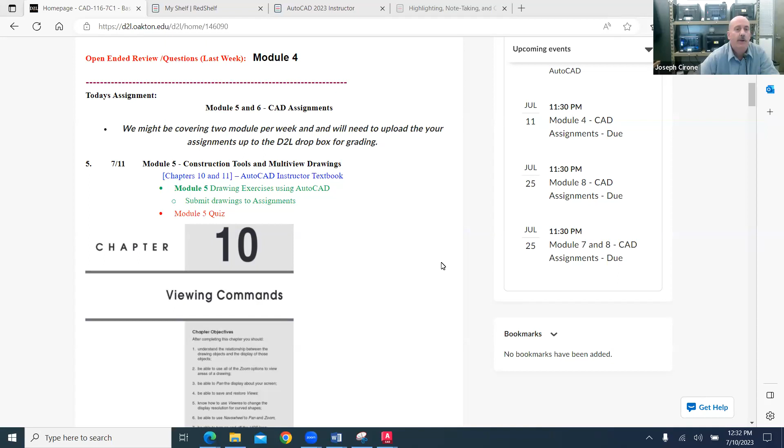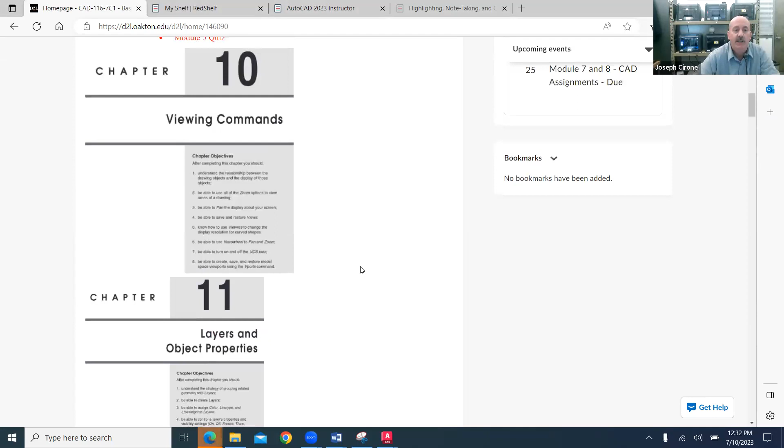Today we're going to look at Module 5, which covers Chapter 10 and Chapter 11 from our textbook. So we're going to take a look at those textbook chapters. And I've also included in the main splash page the drawing assignment. You're to choose one drawing assignment, either one of these two mechanical drawings or this civil drawing.

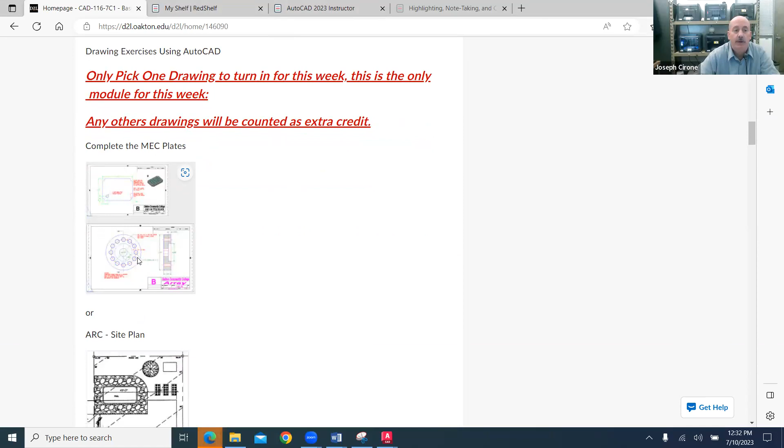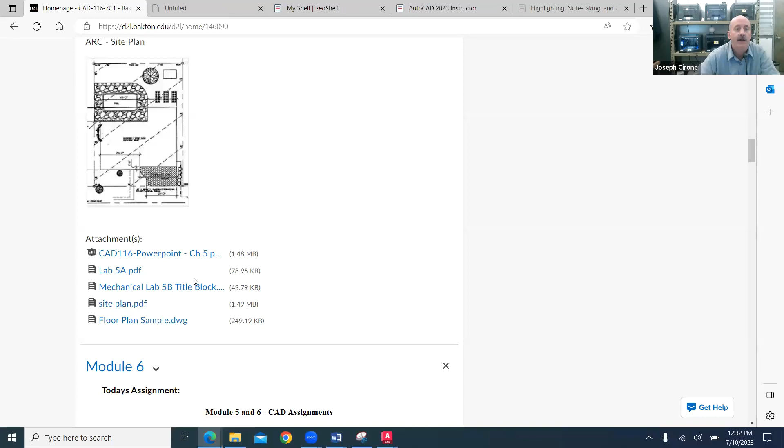And then we have some attachments here for downloads. I've set this attachment here that'll allow us to take a look at an example that we can use for the chapter. So I'm going to download this file right here and open it. And we have this floor plan sample that toggles with the textbook chapter.

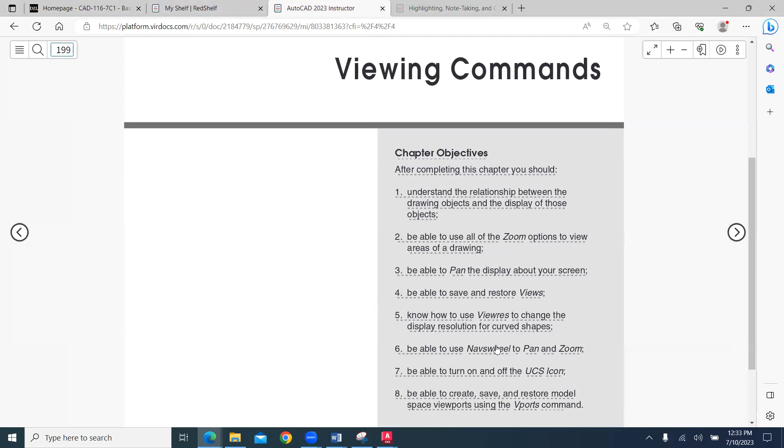And so as we open that in AutoCAD, we can see that, and we can start to set up and take a look at our tabs. We look at the chapter. We're looking at understanding the relationship between drawing objects in the display using zoom commands, pan commands, view resolution, navigation wheels. There's a lot of different ways to do things.

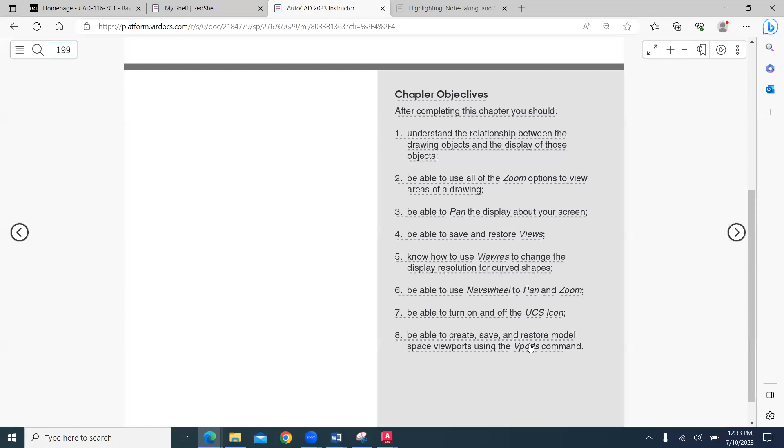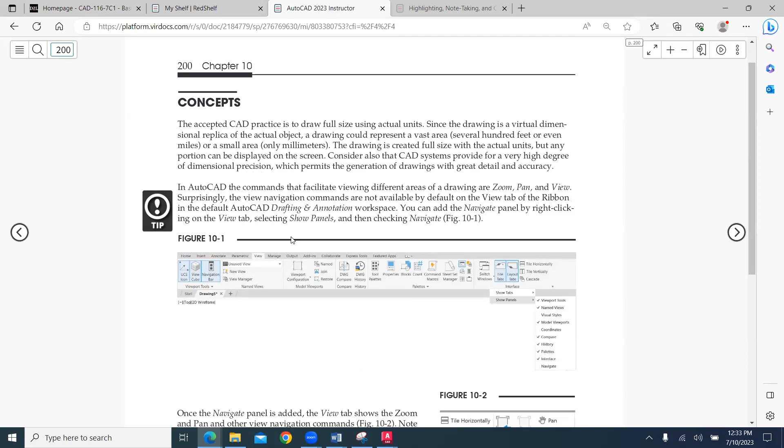User coordinate systems, and then being able to save and restore viewports. The basic concept is that we create these full-size drawings that are scaled to actual units, and then we're able to see them on the CAD system. And so when we look at these different drawings and we open them up, we can use the navigate panel to go through these different display commands.

So we can go to the main splash page and open this floor plan sample drawing, just as an example. And so here's our floor plan sample drawing. And then as we look at that, let's see if we can get this to fit on the screen.

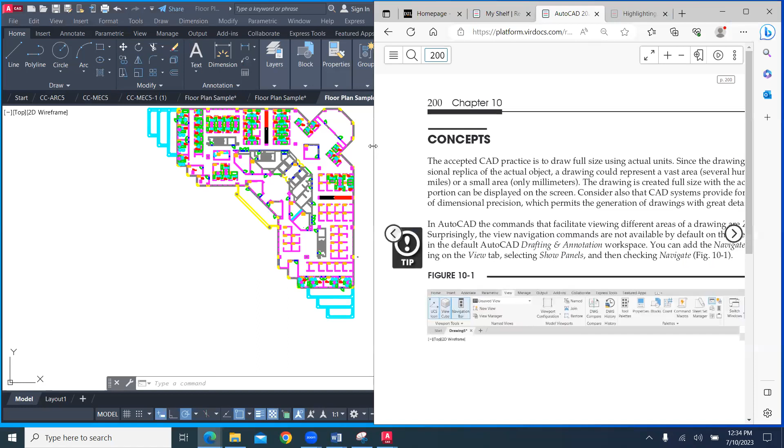So as we look at our sample drawing, the concept is that we would create the drawing full size. And if we were to go back to our CAD system, we can then check our units.

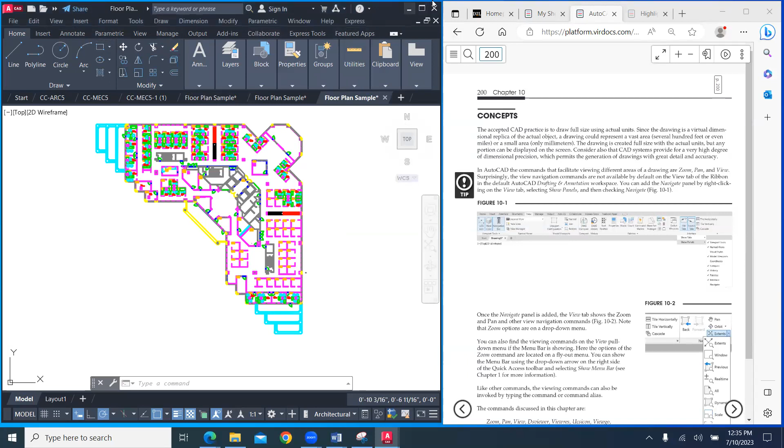And so we can enable our toolbar. And so here's the menu bar. So if I turn off the menu bar, show the menu bar, we'll have this menu bar here across the top. And then, for example, if we wanted to check the format of this and we wanted to look at the drawing units, we could see that this is an architectural drawing, and the units would then be set up in feet and inches.

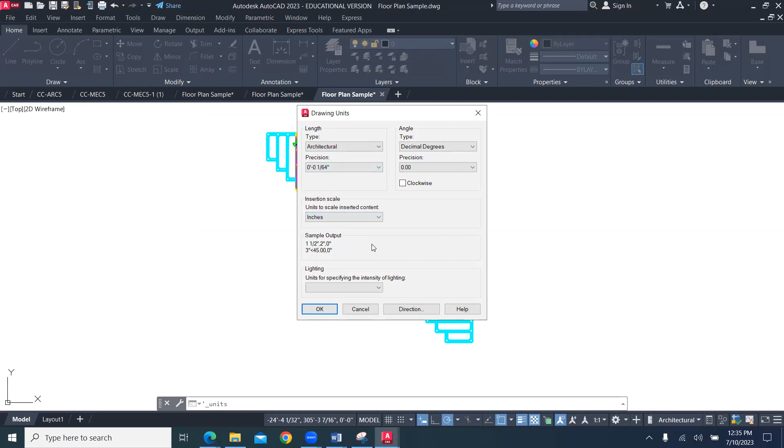We can check the navigation panel and then make sure that we have these different commands active. And that's part of getting to use AutoCAD. And so when we look at the tabs,

we have a home tab, an insert tab, an annotate tab, and a view tab. And if you don't have one of those tabs on, what you do is you right click in an area and then you check to see that you have those tabs enabled. So we have our home tab, our insert tab, our annotate tab, home, insert, annotate.

And then when we're on the view tab, what we want to do is we want to make sure that we have the same tabs that are active. And so what they're showing here is on the tab that they have the navigate panel enabled.

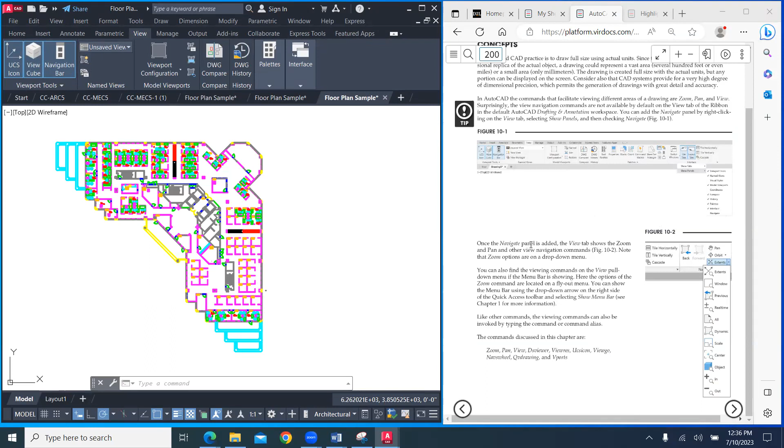And so to enable the navigate tab, what you do is you right mouse click and then you say show tabs, and then make sure, show panels, and make sure that navigate is checked off. So now that navigate is checked off, you can then see these different commands like extents, window.

And so zoom extents will zoom everything that's within the drawing. Zoom window, we could use to create a little box and then zoom in on that window.

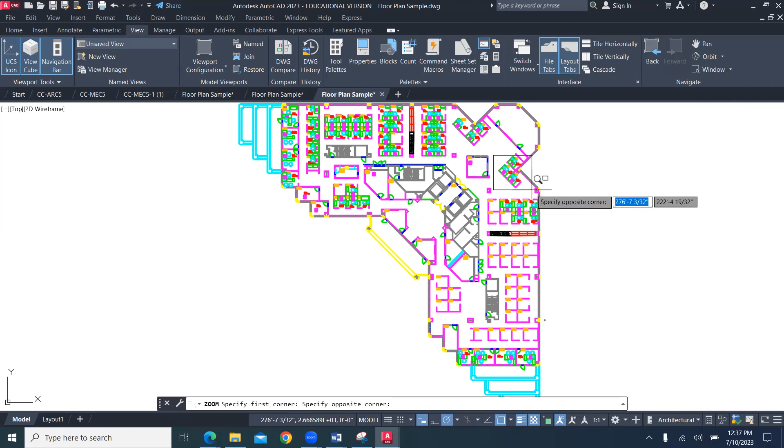The best way to zoom and pan is with the mouse. And so what you really want to do is to get a mouse with a scroll wheel. And so that'll allow you to change the zooming for the mouse by just turning the wheel on the mouse.

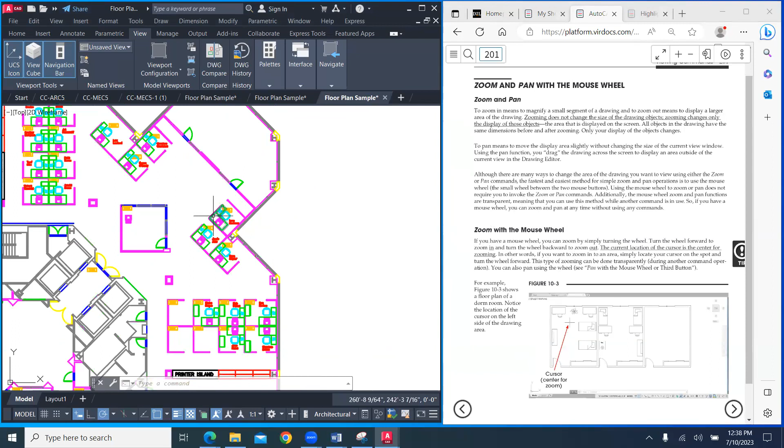And so what they do is they give you an example of how to zoom into a different area. And so if you were looking at the floor plan, if I turn the wheel on the mouse, it'll zoom it out. If I push the wheel on the mouse, it will zoom it in. And it's extremely efficient to be able to go and look at the different areas of the drawing.

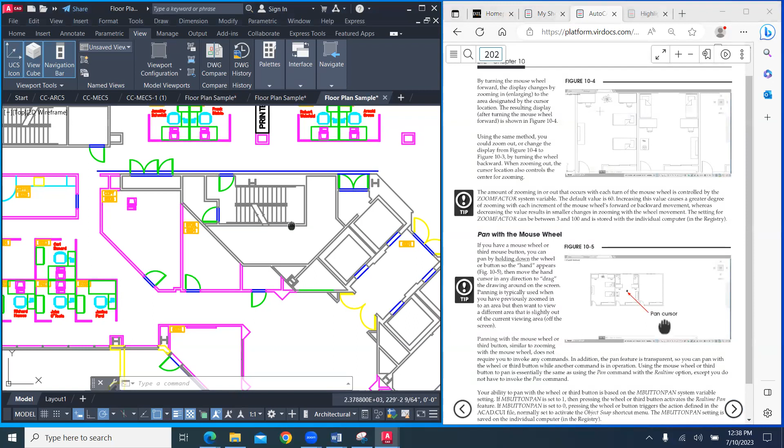If we wanted to pan with the mouse, what we do is we would push the middle mouse wheel and you get the hand, and it'll allow you to look around the drawing without changing the level of magnification. And so you can either be in really close and then pan around and you can see all these different cubicles that they have set up, or you can be farther back and look at more of the drawing.

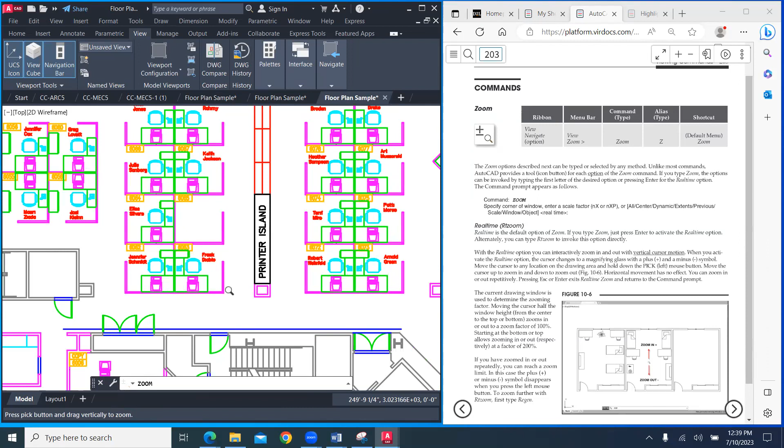AutoCAD is a very well-established command, and they have all these different zoom commands. As the software developed, they added more ways to view drawings. Zoom real time uses the mouse where you can increase or decrease magnification. If you look at the View menu and select zoom real time, clicking and holding while pushing the mouse up increases the magnification level, in case you don't have a scroll wheel, or decreases it. That's what real-time zooming does, and it's really the best way to work with AutoCAD.

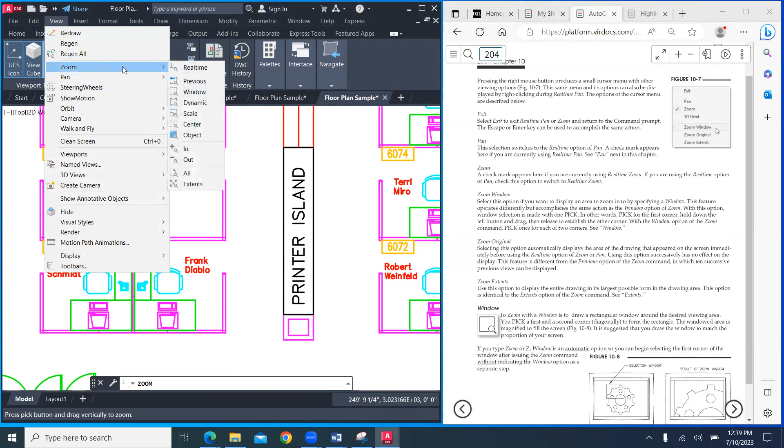Then you have things like zoom window, which is View, Zoom, Window, where you can create a window and zoom in on that detail. You can get extremely small or extremely large as you zoom in. You can exit out or right mouse click within the zoom commands to access some of these other options. So we looked at zoom, zoom window, zoom original, and zoom extents.

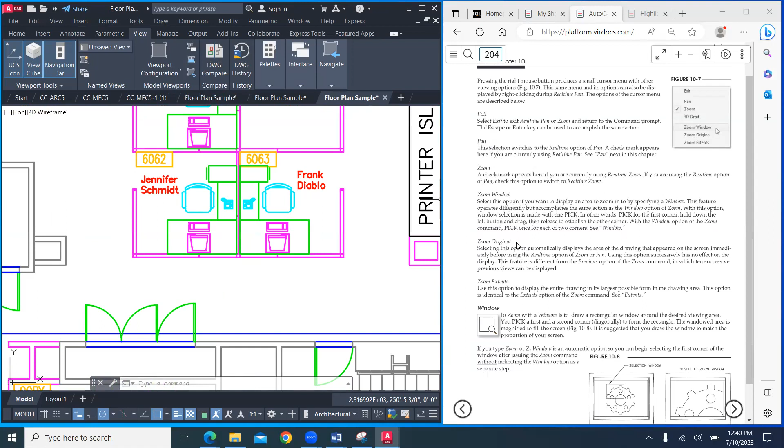If you go to View, Zoom, Extents, really what you want to use is zoom extents and zoom all. That gives you the full perspective of what's available within the drawing. You can zoom in on the objects or zoom at a scale, but you don't really use that command so much as you would set up a viewport. It's just a command that allows you to set the display at a certain percentage.

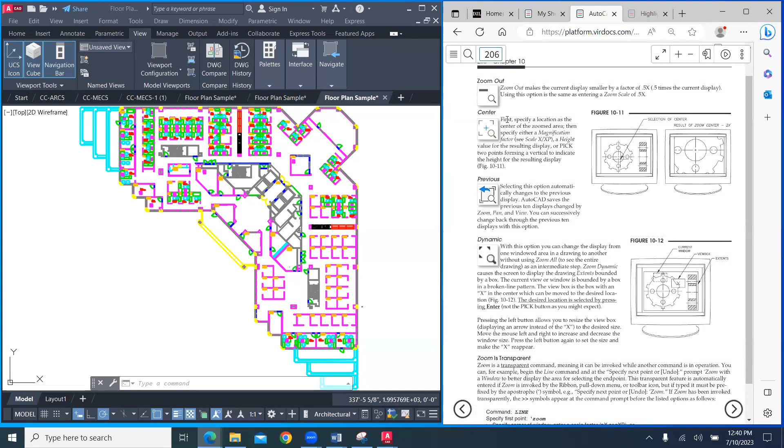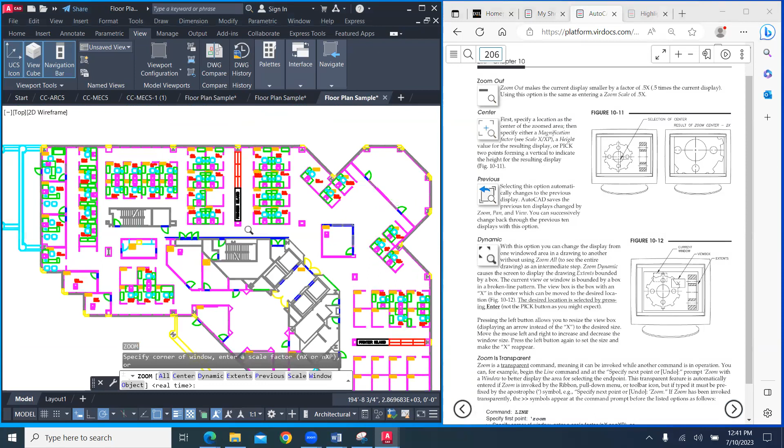As we continue through these zoom commands, you have abilities like zoom previous. If I was zoomed in here and then zoomed back, I could type Z for zoom, then P for previous, and it'll restore to that last zoom level.

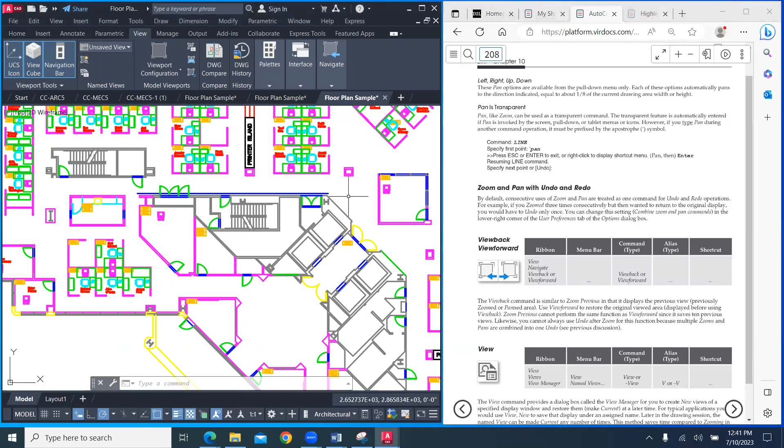You're able to use all these different zooming and magnification commands, but they pretty much all work the same. As you get into the drawings, it's just a matter of navigating your way around and finding things within a floor plan drawing that may be fairly complicated.

Other commands you can use are things like the View command, where you can create a view and restore a view. For example, if I was managing a large enterprise like this and wanted to save a view, I might save it by the room number. So I could go to View, and then save these views.

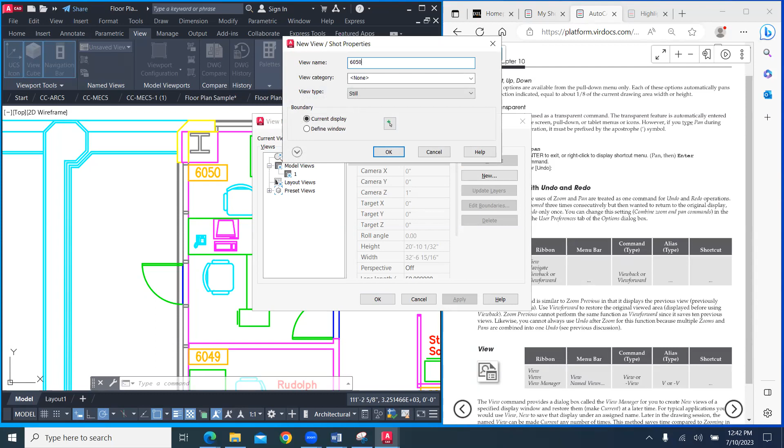As you work with large drawings, let's say I was the facilities manager for the college, I could start saving views by classroom numbers and then quickly tell an employee, 'go to room 6050,' and they could restore that view by saying new view, naming it 6050, and clicking okay, then closing this.

If I had another room I wanted a view of, let's say 6074, I could go to View again. It looks like the first one I called number one, but I can restore these views by clicking on it and choosing to restore it or set the view current. It looks like it didn't do that one, so let me cancel this real quick... I have to click okay, there we go.

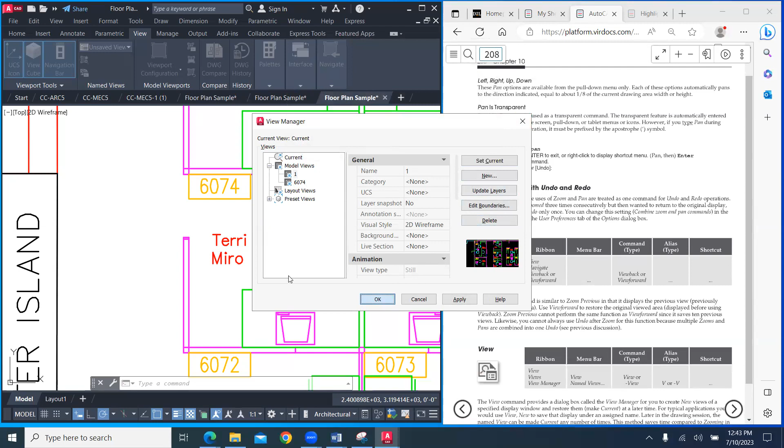Then if I go back to View, I can restore the view by setting it current and applying it. So you can create these different ways to navigate through large drawings that may be fairly complicated. This is explaining how I did that—just creating a view after you've zoomed into an area and then saving it under a name.

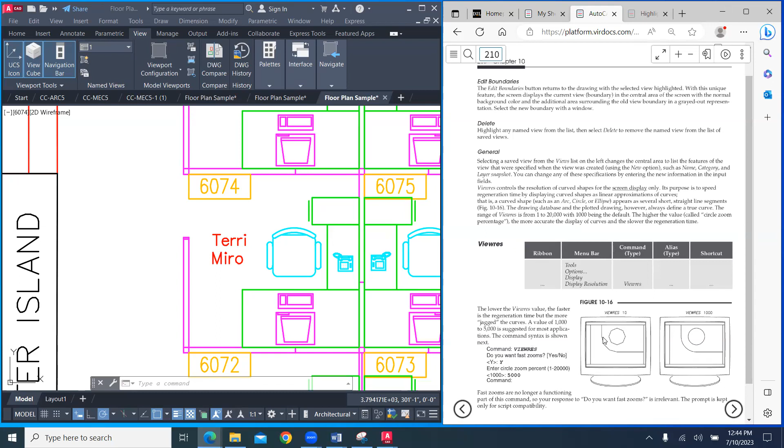View res is a really good command, because things like circles will start to look more blocky as the computer calculates out the circle. As we work with it, the view resolution on circles can be increased with the view res command.

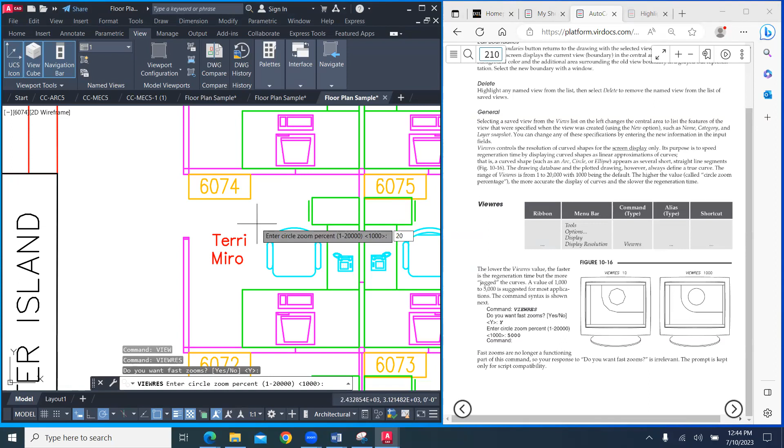When we look at view res, you can increase the zooming resolution based on how high it's set. The lower the resolution, the worse it looks. If you really want something that looks great, you can crank it all the way up to 20,000 and the resolution will be a lot smoother.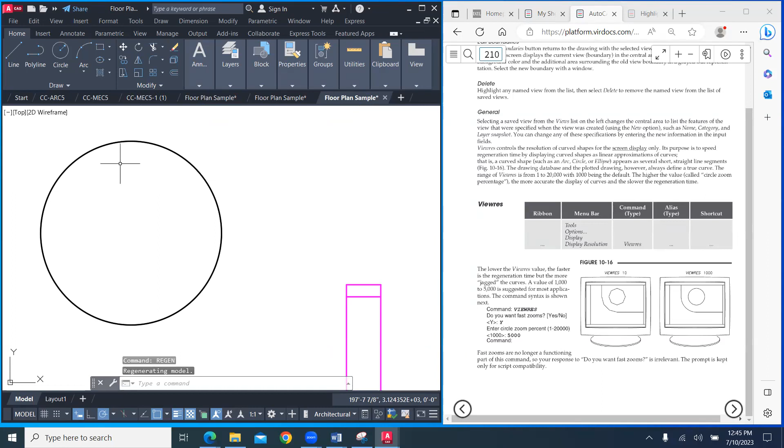For example, if I had a circle that I drew, it looks super smooth. Whereas if I go into Viewres and dial it down to 1,000, then regen, it still looks pretty decent, but you'll get more blockiness. That's the Viewres command. My example didn't work quite as well as the one shown in the textbook.

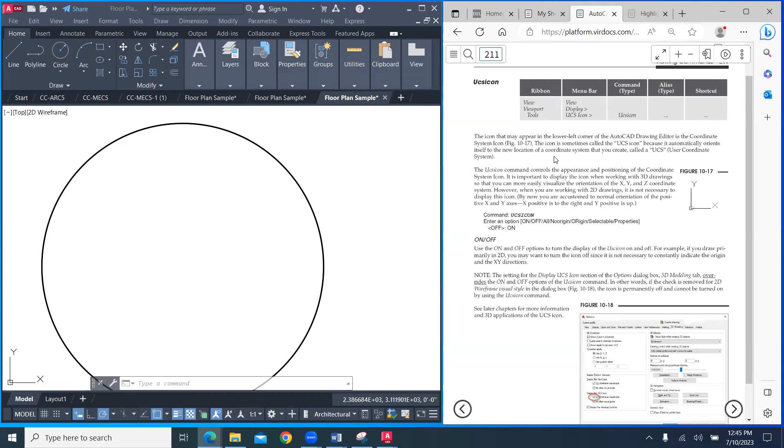Other things we can work with are things like the UCS icon. If we look at the UCS icon, that's this little icon in the lower left-hand corner, and you can turn it on or off with the UCS icon command. So if we zoom back here, let's erase that and look at the UCS icon command.

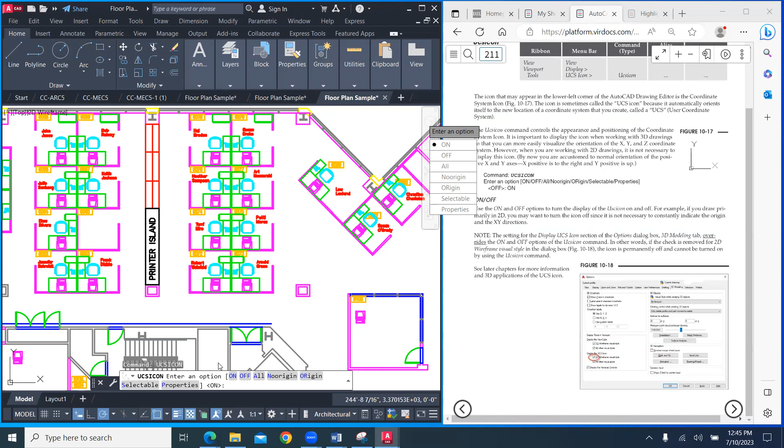When we work with the UCS icon command, we're looking at some of its properties. We can look at the style we want that UCS icon to look like, whether we're looking at a 2D icon or a 3D icon, changing the size, the color, etc. And we can OK that.

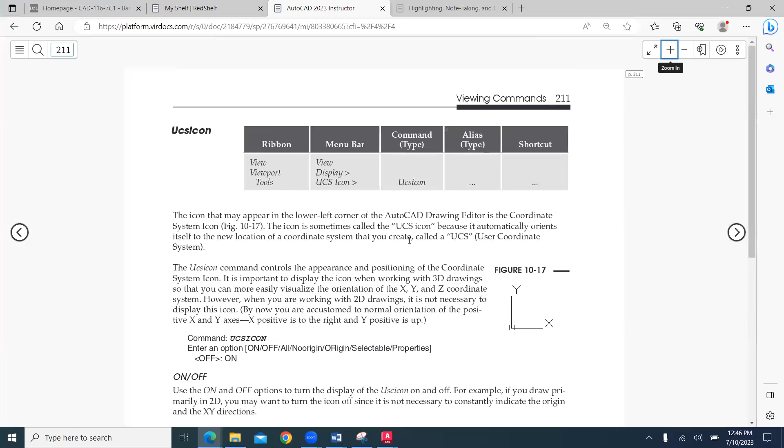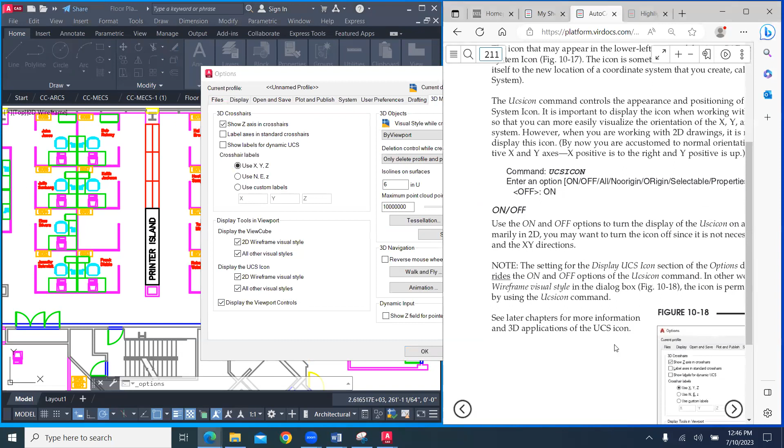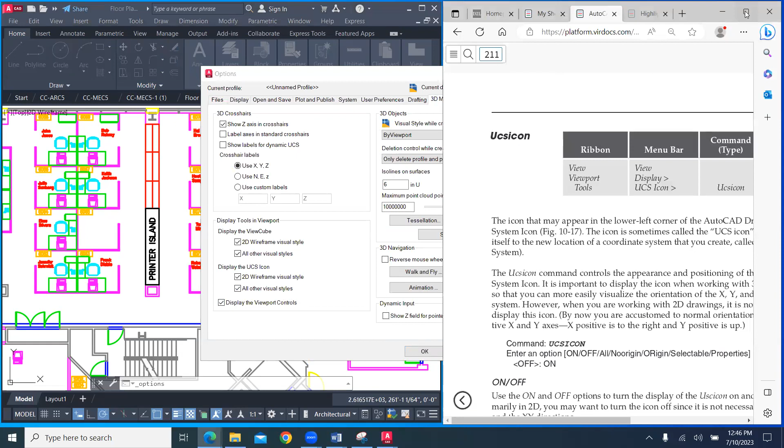This is showing what the UCS icon looks like in the settings command. If we right mouse click and go to options, we can look at 3D modeling and whether you're going to see that UCS icon. It's on the 3D modeling tab, and here's our display of our UCS icon. You can turn it off and work with some other options within that.

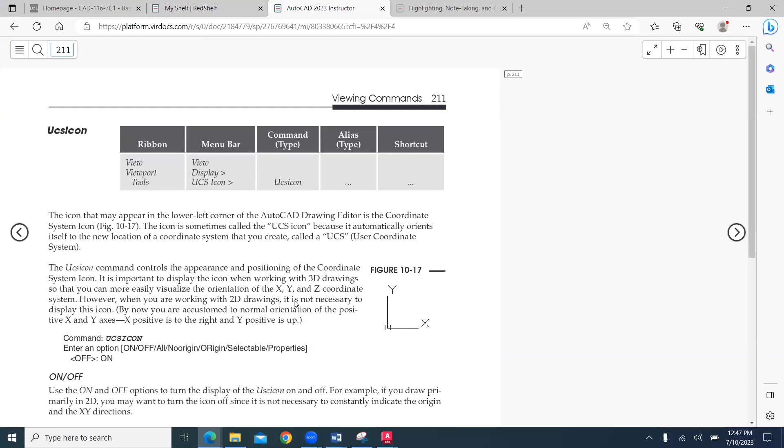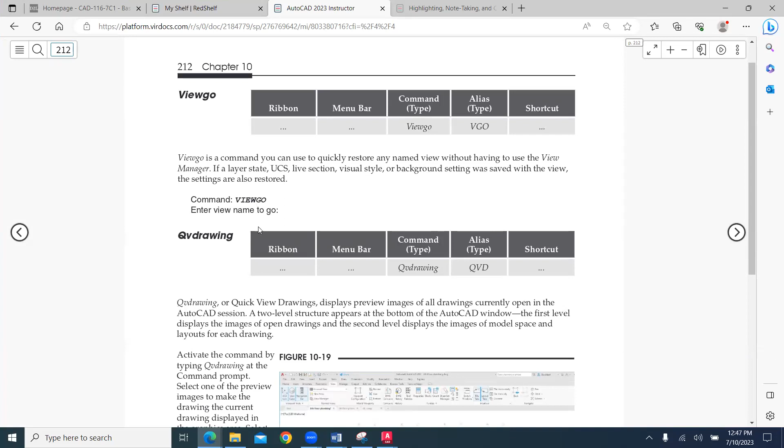All right, continuing on. Viewgo is the same as the View Restore command. You can restore those views with the Viewgo command, going to the view you wanted to save, like we did with the room numbers.

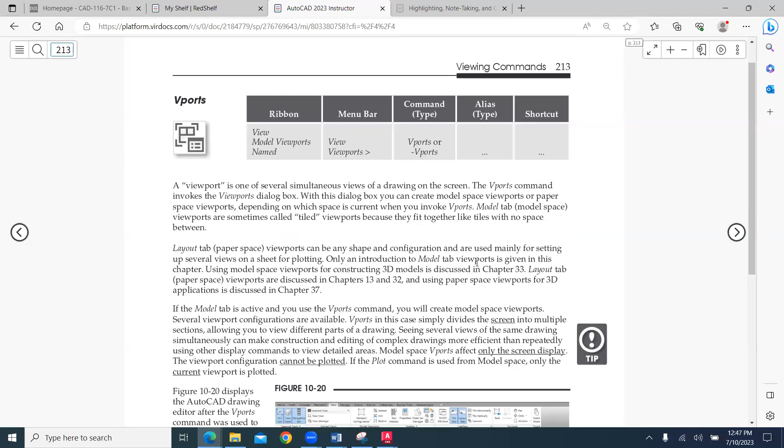Viewports is a really neat command because it works differently in paper space than it does in model space. Viewports looks really cool in model space, where you can divide up the screen like this. So if I was to go back to my drawing...

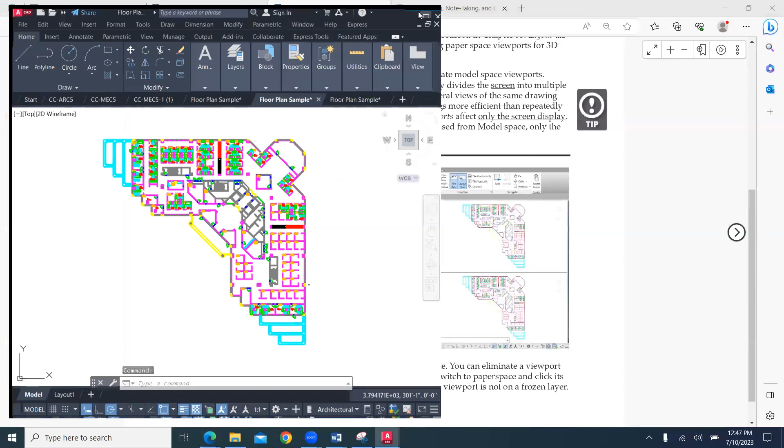While I'm in model space, say Viewports. You can set it up so that you have 4 on the left, and you can set it up in 2D or in 3D. So let's start off with a basic 2D. If we said 4 left, then we would say current views—let's just OK with that.

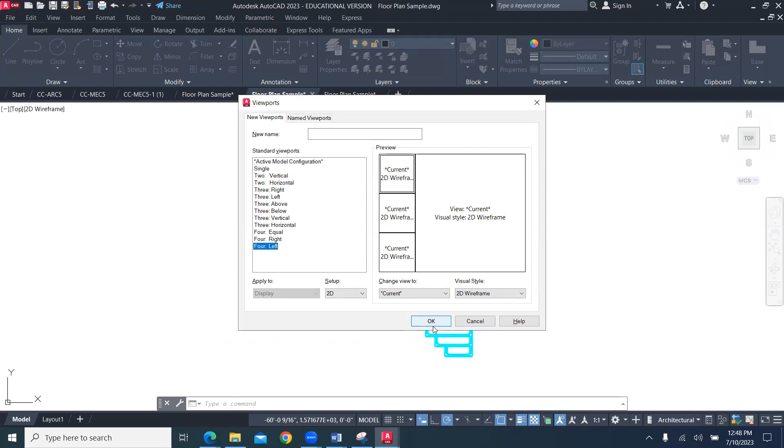Then you can double click in each of the views, and you can have different components that are shown within model space.

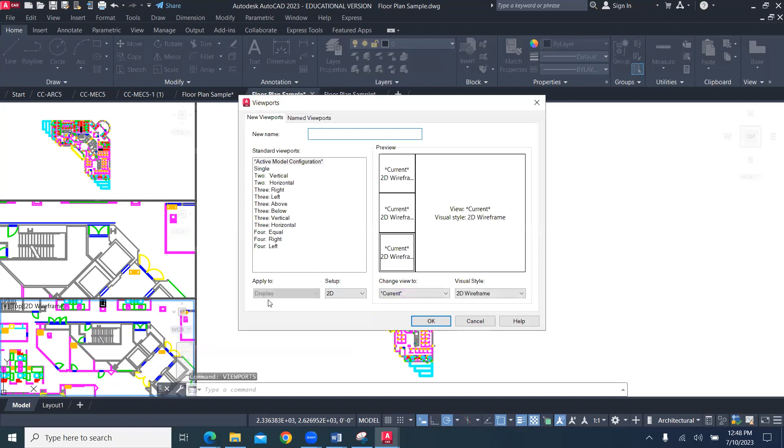And then if we go back to the Viewports command—when you work with something in 3D, you can go through and change things. It's a little bit more dynamic with 3D.

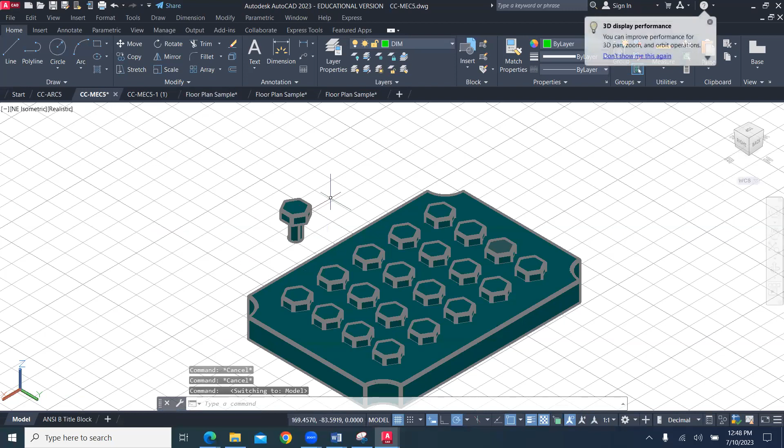So let me open up a 3D drawing. Let's see here, we have our mechanical drawings. Here's one that has some 3D applications to it. If I modeled this, and then typed in Viewports, four left in 3D...

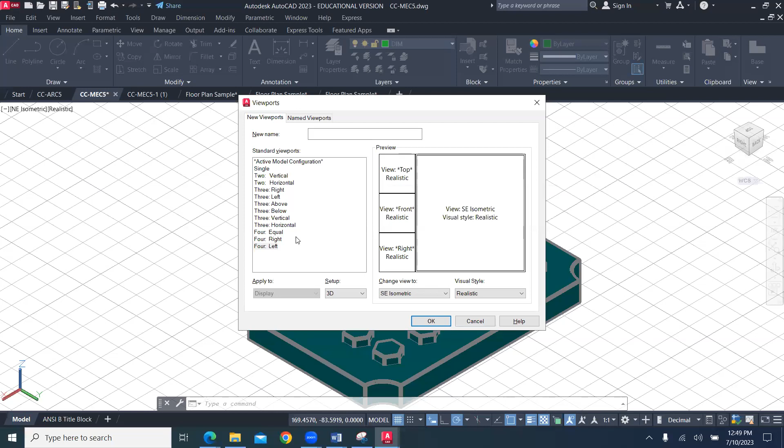Then you have a top view. You can have it set for front view, right side view, and then an isometric view. And you can also have the visual styles shown within each view—these are shown with realistic views.

And then we can go through here, and each viewport is active. You can have it set up with the top view, this would be a front view, and then this would be the side view.

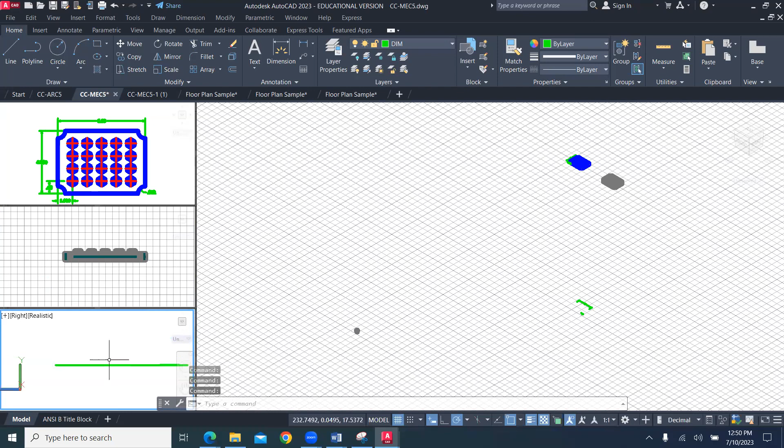This allows you to navigate through the model to see these different components within the drawing with viewports—they're really kind of neat. You can have a perspective where you're in one view, start a line, then snap into another view and grab and create that geometry in other views. So it has some great applications.

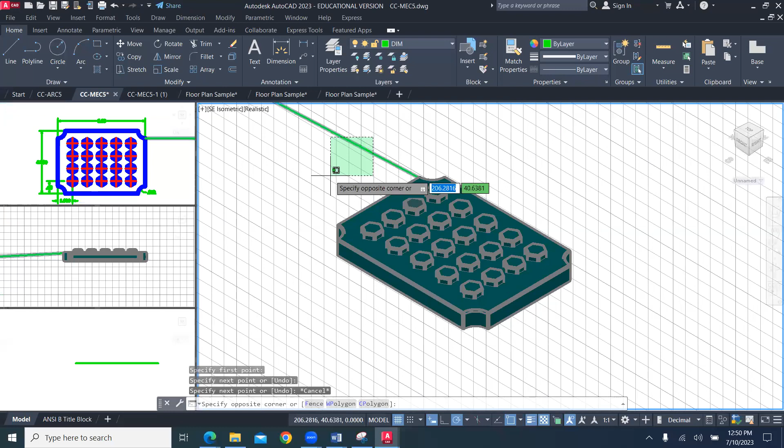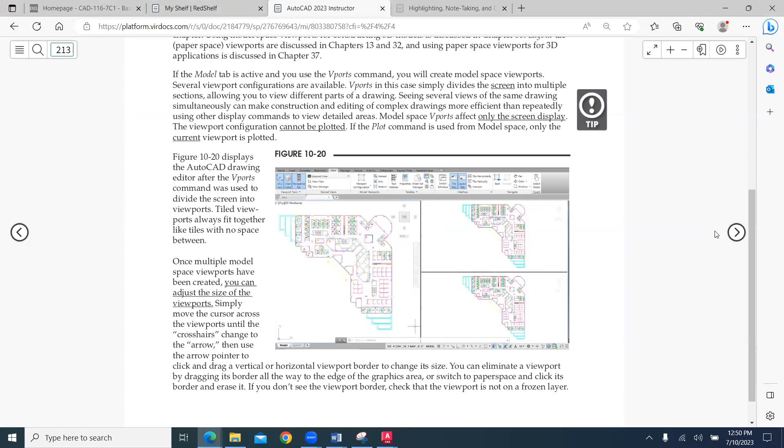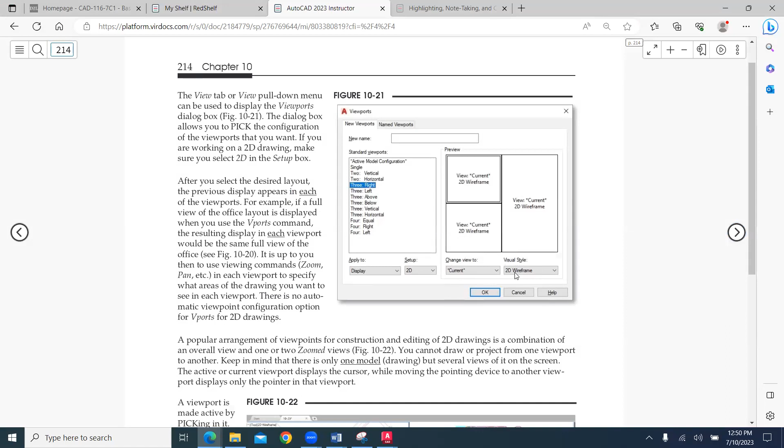But in a basic course, we're just looking at how these different view commands work. So you have viewports, and in model space you can create these different viewports, then set up what you have displayed within them. You can also set whether you want a visual style of wireframe or conceptual, depending on what visual style you prefer.

That's basically where the textbook kind of leaves off. Now, if we were to look at that chapter and that same area within the drawing, you can also work with viewports in paper space when we work with layouts. It looks like they're going to cover that in a different chapter, so we won't go into that at this point.

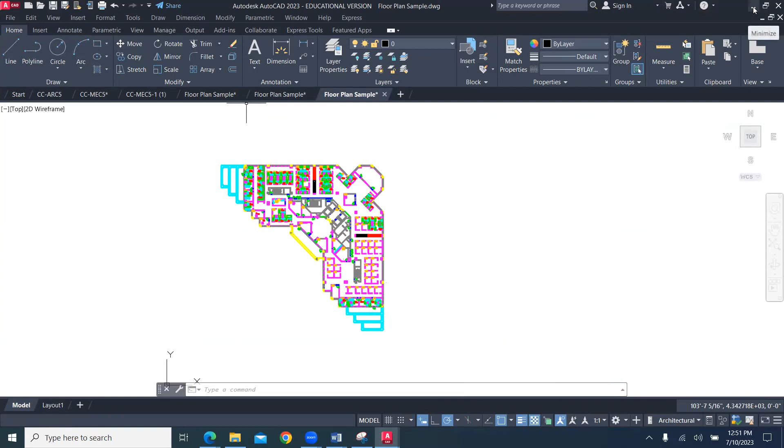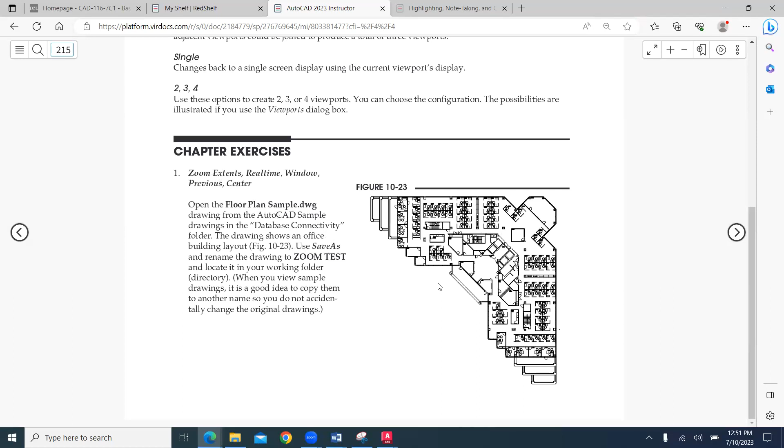So when we look at the view command in the chapter and exercises, we're looking at being able to manipulate these different drawing objects and look at them. One of the chapter exercises is to look at the floor plan sample drawing and the different areas of it, being able to zoom in using zoom Realtime, zoom extents, etc. All right, so as we look at the view commands, this completes our lecture on chapter 10.